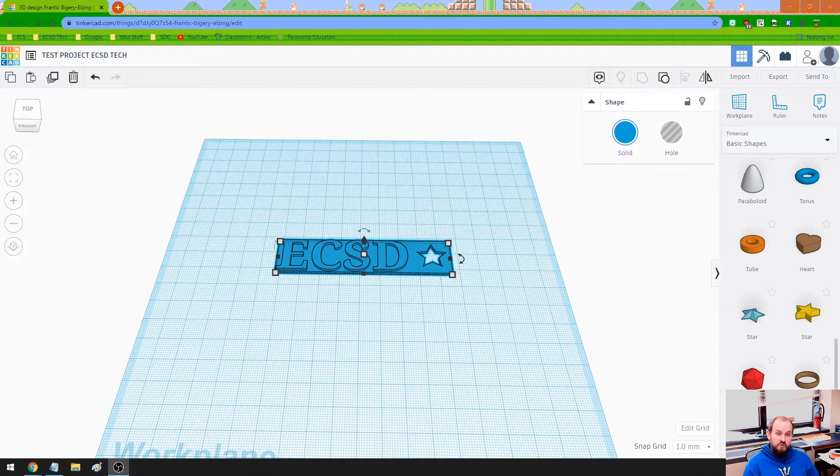So the next thing we're going to look at is the full process from a 3D designed model all the way into something called a slicer software, then it gets plugged into the 3D printer and we'll see it move into action. What I have here is a quickly and not so well designed little slab, just a piece of plastic with ECSD in it and a star punched out of it. This took about 5 minutes to design, pretty sloppy, but we're going to see it build from the digital conception all the way into the 3D printer coming out as a piece of plastic.

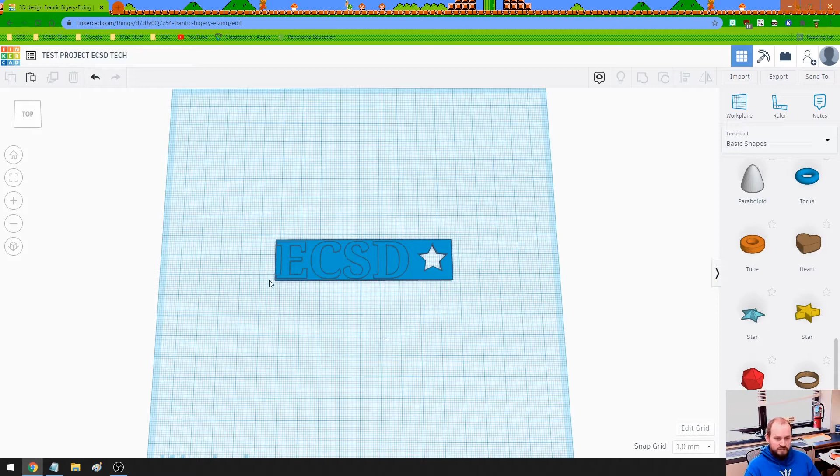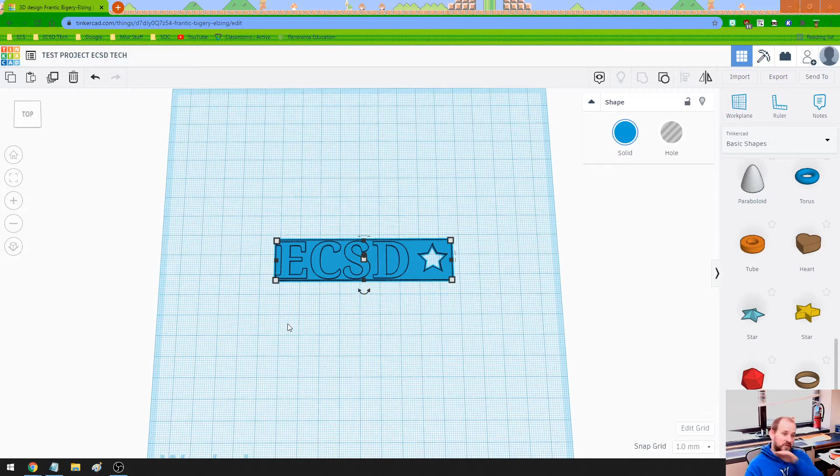The first thing we're going to do is export it from this site, bring it onto our computer from the internet, and then open it up. This auto-opens with a program called Cura, C-U-R-A. This program is called a slicer. Basically what it does is take the 3D model, the 3D file that represents this design, and break it down or slice it into tiny mathematical instructions that the 3D printer can take and turn into building each layer from the bottom up.

So we have our program Cura opening, and it looks good in this program. This is something we can use to take a look at it. When I'm ready to have it work, all I have to do is click on Slice. It's going to slice it up, and it's telling us it will take about 39 minutes to produce this piece of plastic, using 4 grams of our plastic.

I'm going to plug in our micro SD card, and it's going to recognize it in about a second. There we go, we're going to save it to this micro SD card. So, CE3 Pro, that's the Ender 3 Pro we're working with. Test project, ecsdtech.gcode. I'm going to eject this so we can safely remove it.

Now we can take that micro SD card and plug it into one of our 3D printers. Once we do that, we'll be able to initiate the print process, and it's going to print this thing from the bottom up. We'll jump in a second and see what it looks like from there.

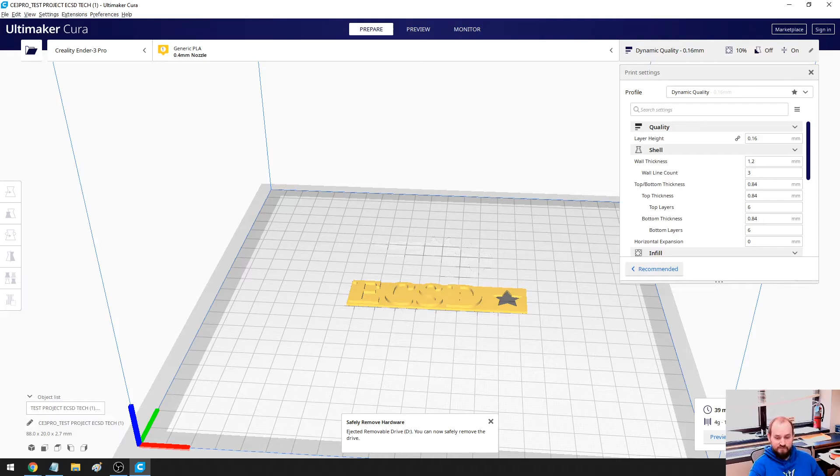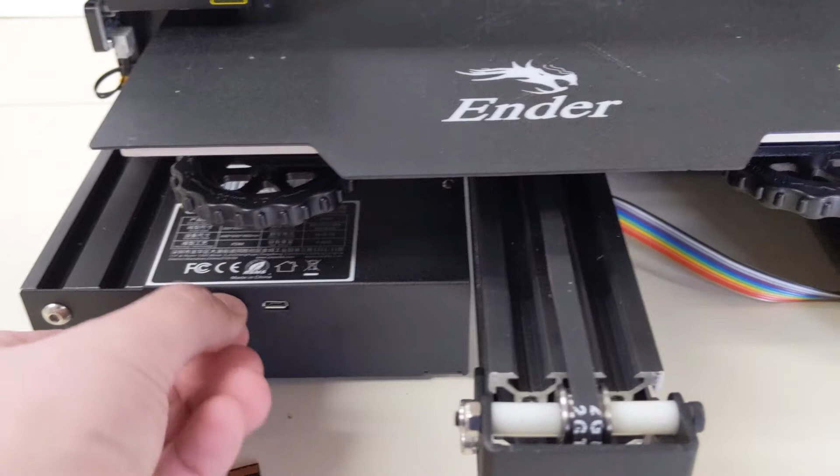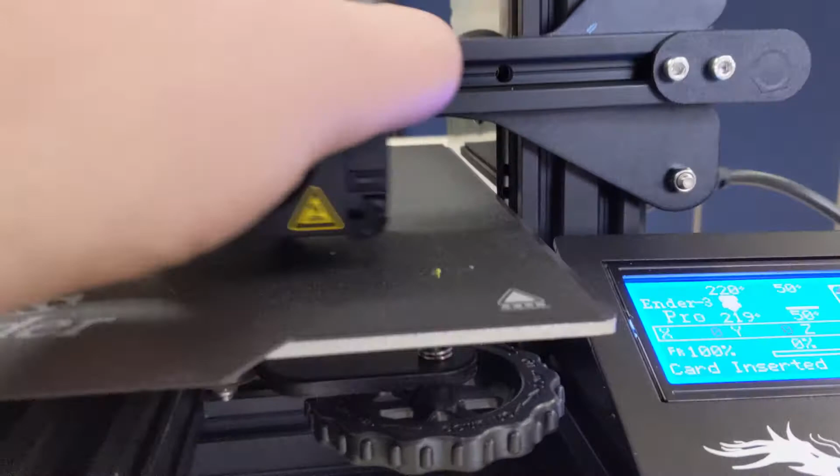So from the 3D model, we are going to retrieve the micro SD card from our computer and bring that file over to our 3D printer. We're going to plug the micro SD card in. We can see this is already calibrated, I've aligned it and made sure the alignment is perfect, and we're good to go to set this print into motion. So we're going to go onto the screen, navigate to that item, print, and this is the one we're going to build.

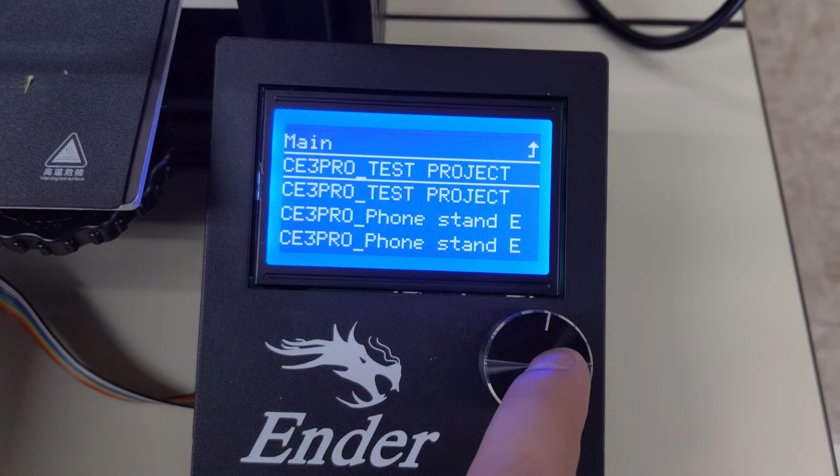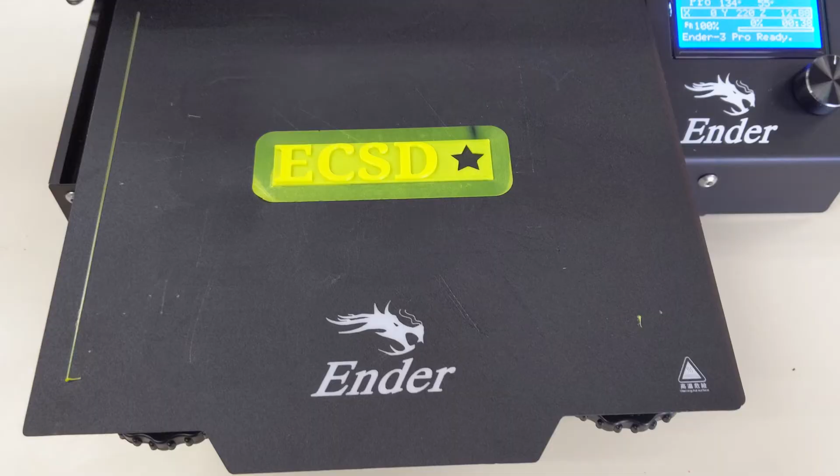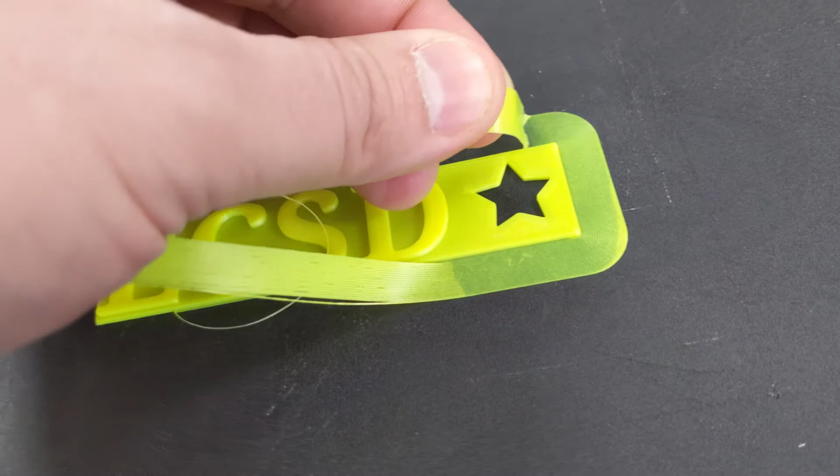Alright, and there we go, that is our 3D printed object. So I'm just going to peel it off. We added a little bit of a side, kind of like a skirt or a brim on it, and we'll talk about all these different things, how we do it, what we do, why we attach them, and everything else like that. But now I should be able to just pop this right off.

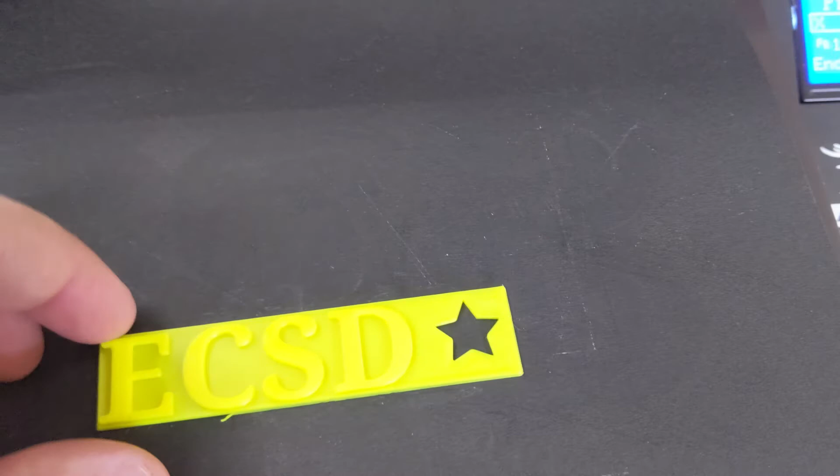It's sticking a little bit, that's actually a good one. And there we go. Slowly peel it off, and there we go. Now we have our own little 3D printed piece of plastic. We can design whatever we want with it, we can do some pretty neat stuff.

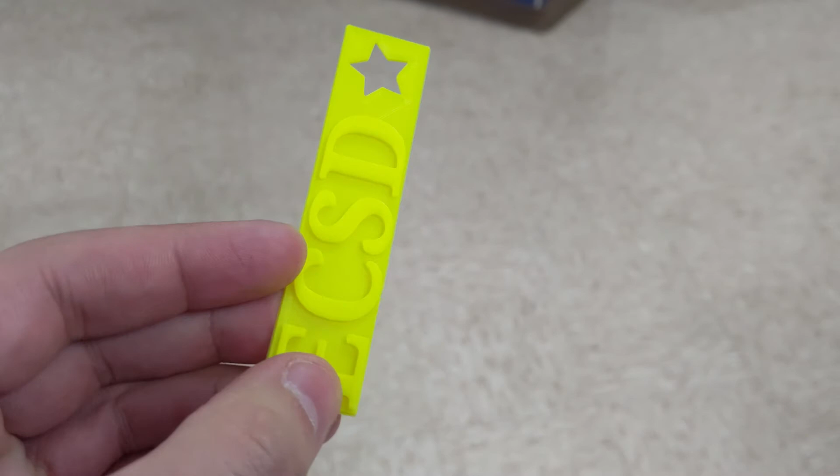So overall I'd say this is pretty easy, pretty successful. We're going to be doing this entire process together to create things such as a keychain, hall passes for teachers, and a lot of different things that are going to be customized. By the end of it, you're also going to have an opportunity to create your own 3D print of whatever you want, as long as it stays within specific size proportions. So that's pretty much the 3D printers, and I can't wait to have you all making your own masterpieces.